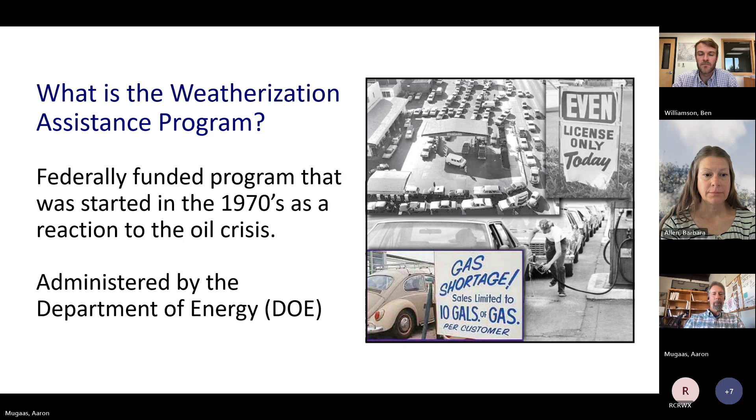The mission of the program is to reduce energy costs for low-income families, particularly elderly and disabled, and children, while ensuring their health and safety. That's kind of a good mission for all houses, right? We want to live in safe, comfortable places. So that's the mission of our weatherization program.

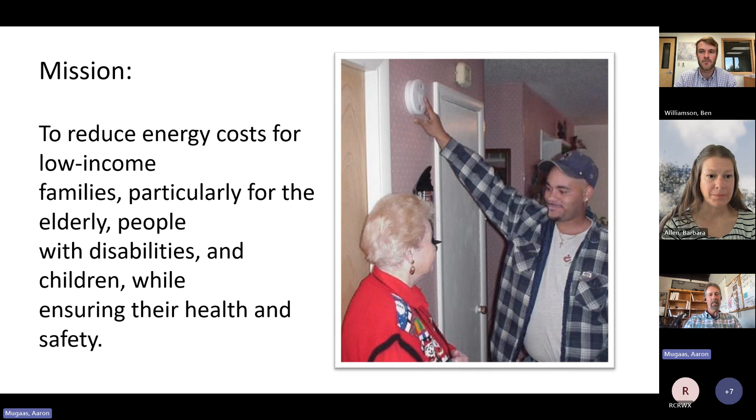Looks like it's just going to have a little delay in changing slides.

The program weatherizes a lot of homes throughout the country. It's pretty amazing to me how much energy has been saved over the course of the program: 7 million families since 1976. This is mostly single family housing, some multifamily as well in larger cities and things like that.

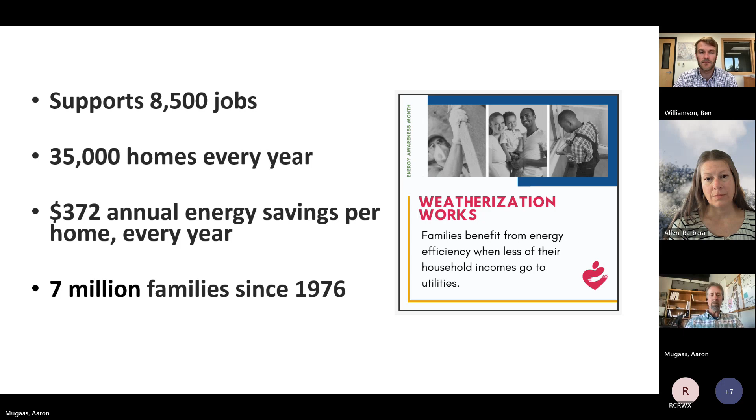In case you're wondering who administers this program and who does the work on these homes, it's community action agencies throughout the country, places like the HRDC here in Bozeman, and Action Incorporated in Butte, Montana. They all have a little bit different name, but they're set up to help communities with all kinds of different things, including food banks, Head Start, things like that. So weatherization, they've been tasked with this program. Usually the money comes to the states and then it's sent to these agencies.

The work done in the home, this is a really long list of work. I don't expect you to memorize or read every sentence, but just to give you an idea, there's a lot of things that we do on homes.

It's very structured, and we have a lot of training for our staff. They know how to think about a house as a system, and then learn all the skills to actually get the work done. So we do insulation and air sealing, minor repairs, ventilation for the indoor air quality piece, and a little bit of base load energy measures. We'll talk a little bit about base load—that's all the things that are user dependent instead of shell dependent. So we try to improve on the base load measures as well, where we can.

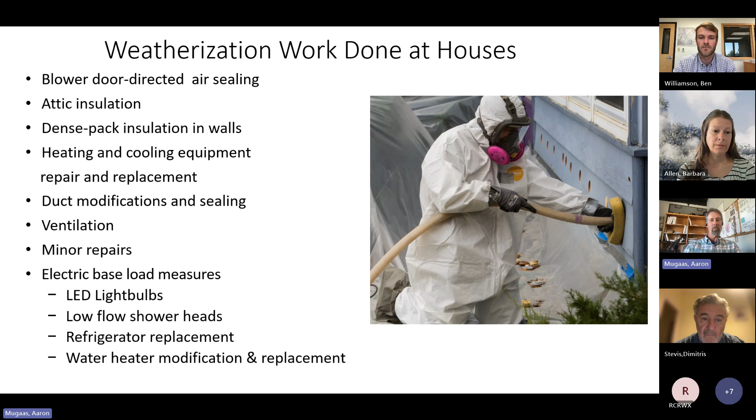The training centers were started in the 1990s by the DOE to help train the staff of weatherization, to get everybody on the same page with the work being done and the skills needed to do that work. So here's us, some of our crew, training some folks at the training center here.

So let's get to the meat of working on homes a little bit. We're going to go over a little bit of house as a system, how energy moves in homes, to make you think like an energy auditor.

So we're trying to reduce heat loss by insulation and air sealing. It's pretty simple, it's not a very glamorous or really all that cutting edge process. I always think of it as we're in the trenches of home performance, right? We're doing nasty, dirty work. We're just trying to get the shells of homes to be more energy efficient.

Existing homes—we have a lot of older homes in America, and believe it or not, there's many homes with zero insulation in the walls, attics, crawl spaces, basements. It even crosses all socioeconomic lines. I've seen mansions in Bozeman with no insulation in the walls because they just weren't built that way when they were built. So it really is something that needs to be addressed, and I think it's starting to be addressed more recently with a lot of the funding that's been coming out. For folks that aren't low income, I think there's some insulation and air sealing money that can come your way as well.

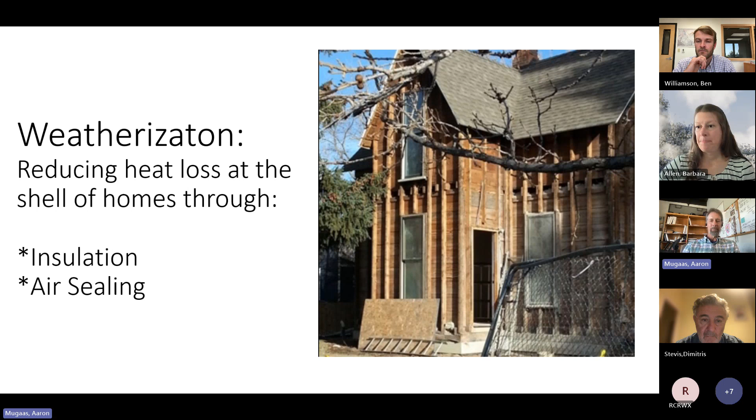So the first process in doing work on a home is what we call an energy audit. There's a lot that goes into the energy audit. You assess the building more like a home inspector, check out all the systems, make sure everything's sound and healthy. You're doing blower door testing and other diagnostic tests like combustion analysis of appliances. You're looking at the heating system, insulation, doors and windows, and then you're doing an energy model. We want to see how much energy this structure is using now, and what would it use with these retrofit measures? How could we reduce that, and what's it going to cost? So we put all that in the computer and figure out what's most cost effective to reduce the energy burden on that home and the energy loss out of the shell.

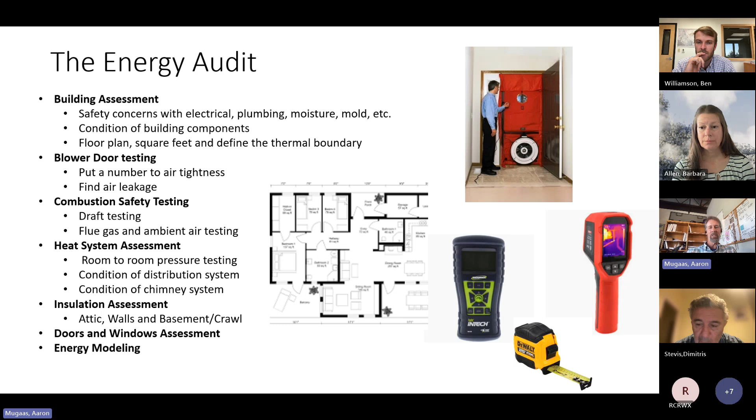So let's do a little bit of talk here about, so we can think like an auditor.

House as a system, that's what we pound into our students. A house is a system of interdependent parts. When you do something to one thing in a house, it affects another. And when they all work together, we hopefully get a comfortable, safe, and efficient place to live.

Sometimes when you do something to a home, you get problems. We're going to talk a little bit about those problems. Sometimes they're not problems as far as endangering anyone, just thermal problems. But sometimes they could be dangerous situations that we create.

Keep in mind the house has been functioning. Sometimes when you change the shell of a home, it's been functioning the way it's been for 80, 100, 50 years, and you're going to change how it performs. Usually that's for the better, that's the goal.

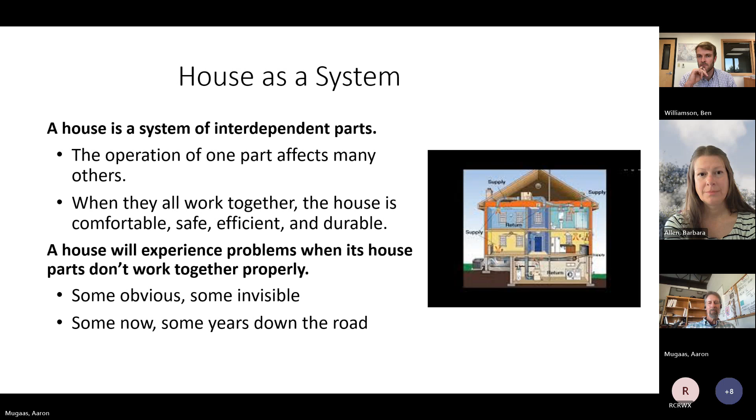This is an example: you have an older home without much insulation. So the heating system has to run a lot to keep up with the heat loss, and the heater has to be pretty large.

When we go in and insulate—let's say we insulate the attic, dense-pack the walls, insulate the basement, plug up all the air leaks—now that big furnace is completely unnecessary. It will actually become even less efficient because it will come on and go off very often. So now we can put in a smaller furnace. If you put in a really efficient furnace, it can be even smaller because it will have 99% efficiency instead of 60% efficiency.

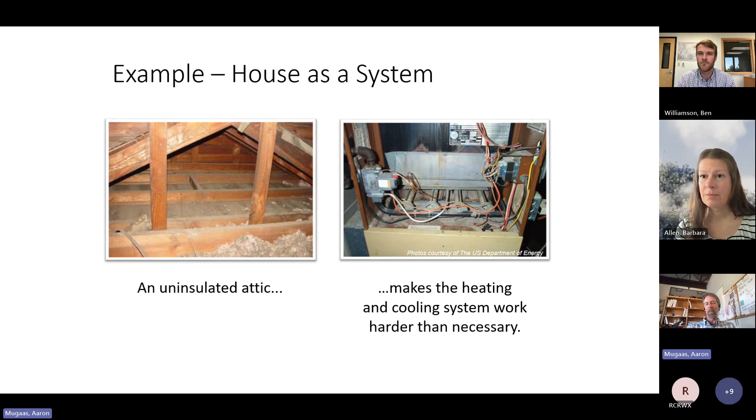So this is just one example of how doing one thing can affect something else. This is why you're paying that energy auditor, by the way. A lot of people can find things to do on their homes, and a lot of people are very knowledgeable about what to do. But it's really nice to have someone who can think about the whole house and give you recommendations based on the whole house as a system.

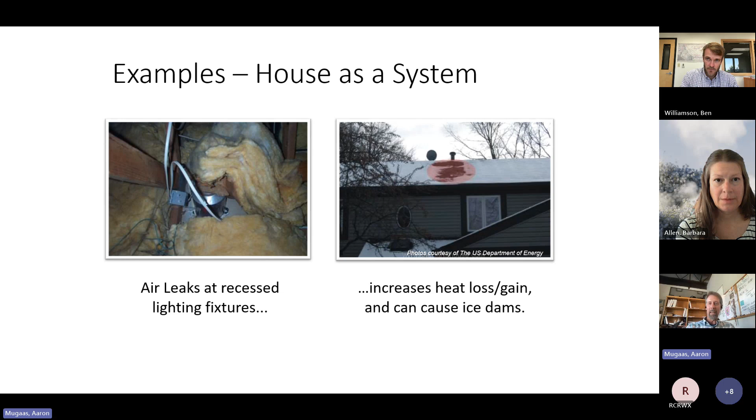Here's another example: we have air leaking into the attic through a can light, say, and it creates a warm spot. A lot of heat is escaping, and we have more chance of ice dams on the roof.

Another quick example: we have a leaky exhaust fan duct, or maybe no exhaust fan duct, that creates moisture in the attic, causing some rot on the roof deck. Also probably a lack of ventilation in this attic, so the moisture can't get out very easily.

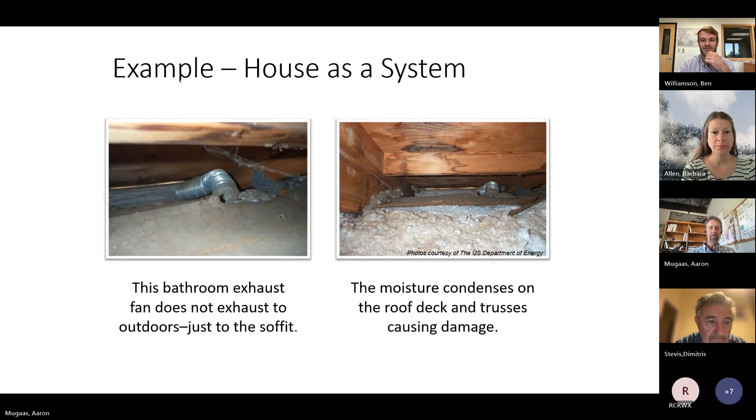One of the things I was saying is that there are some bad implications of the work we do. One of the biggest things we fight in weatherization is that we make houses very tight, but they typically still have traditional atmospherically drafted appliances, meaning they depend on the stack effect for the hot gases to get out of the house. That stack effect is fairly strong, and it has been doing its job for 50 years, say.

But for every CFM of air that leaves your house, a CFM has to enter. So when you stop all the CFM of air entering, all of a sudden that air has to come from somewhere. So when your exhaust fan comes on—the one you just put in to improve your indoor air quality—when your dryer comes on, when your stove fan comes on, and when they all come on together, that can pull those flue gases back into your house from your water heater and your furnace.

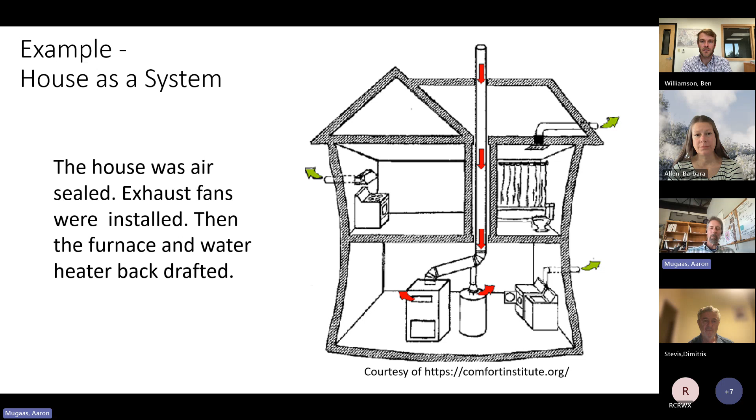So this is something that we go through a lot of pains to make sure doesn't happen, and to correct it when it does. We want to save that energy by air sealing—definitely the cheapest and easiest thing you can do—but we don't want to have these other problems.

Let's talk a little bit about thermodynamics and how energy moves. The big thing here is it goes from high to low. So in our cold climate, our heat is always trying to go out. And in a cooling climate, it's the opposite—heat is always trying to come in to those houses.

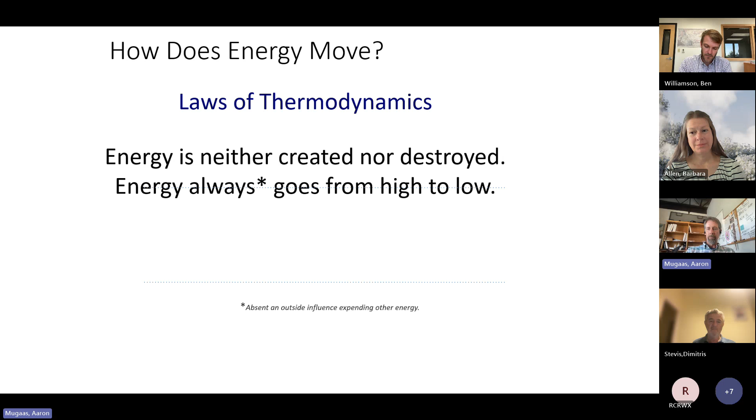There are 3 ways that heat moves through the home: radiation, conduction, and convection.

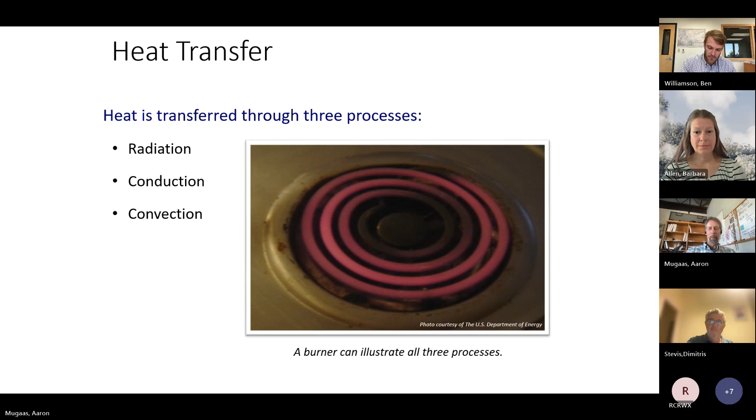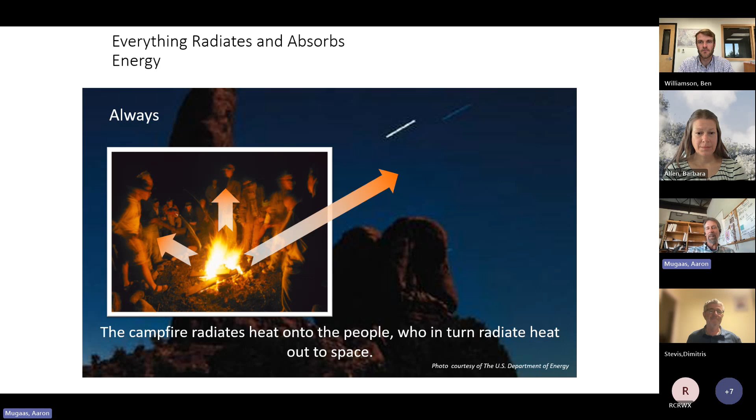Radiation is heat radiating from something. Heat that radiates is absorbed by other things. It's never created or destroyed. So standing by the campfire, heat is radiated to you, and then we radiate that out into space.

Conduction is the heat loss we deal with when we add insulation. We want to stop the conduction of heat through the wall, the attic, or the foundation. That's heat transferred from the burner to the bottom of the pot, for example.

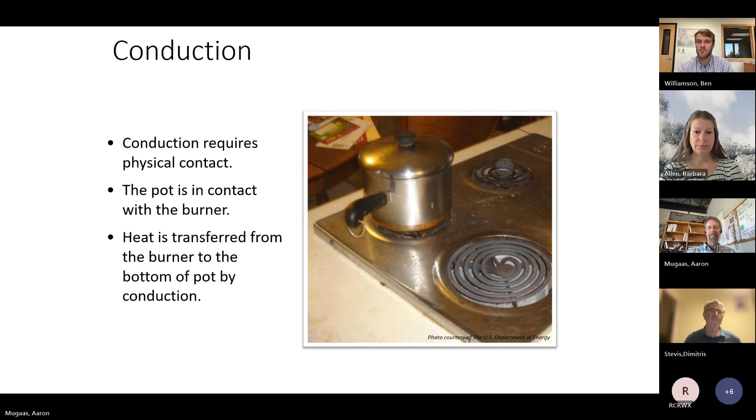Convection is heat traveling through air, water, or whatever medium it is. So it has to have a medium for it to travel through.

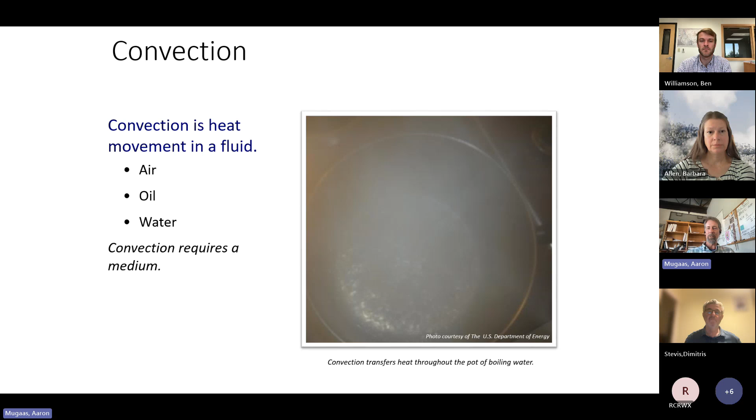In this burner, all 3 are happening at the same time. You have conduction of heat through the metal and into the stove around it. You have convection, air being heated and moving. And you also have radiation, which is infrared energy that can be felt because it's radiating out.

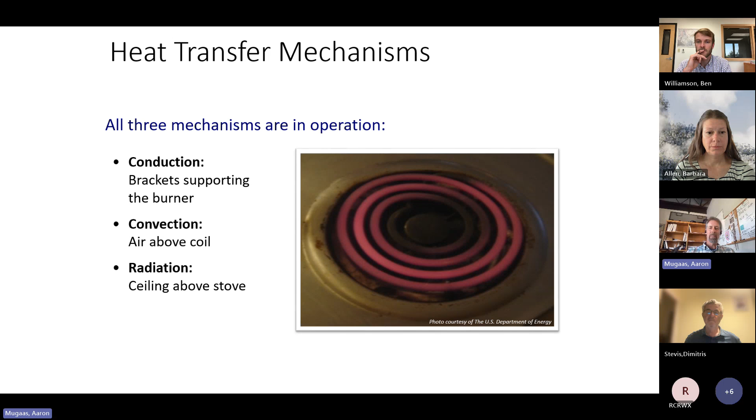The goal of weatherization is to have a comfortable, safe, and efficient home. In order to do that, whether building a new house or retrofitting an old house, we want to have that thermal envelope and an air barrier, and we want them aligned together.

We want properly sized heating equipment, not too small, not too large. We want a really good distribution system so there are no cold spots in the home, and healthy indoor air quality, which goes hand in hand with some of these things.

For example, if you're in an old house with just a central heater, say a space heater in the living room, you're going to have very cold closets, very cold bedrooms, and a higher chance of condensation from interior moisture hitting those cold walls, and a higher chance of mold developing.

So having a house work well thermally is going to help with indoor air quality ultimately.

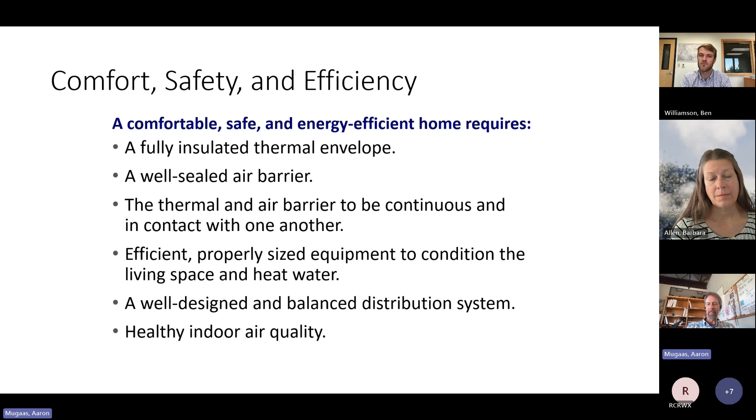The thermal boundary of a home, on a complicated home, is sometimes a hard thing to define and deal with. If you have a very complex home, the auditor needs to figure out where to draw the line for the thermal envelope.

That's a big part of some houses. Some houses are simple, right? It's a ranch house, it's got a big attic, it's a rectangle, so we can easily define that thermal envelope.

This little factoid at the bottom, I love this one: a 7% void can reduce the R value by almost 50%. It's called a thermal window.

I like to give the example: let's say you went down to the Patagonia outlet in Dillon and bought the $800 down parka they use for Mount Everest, with the big hood. You look like the Michelin Man. But the first time you wear it, the zipper breaks.

So now you have this opening in this $800 down parka, and it's not going to keep you warm, is it? It'll keep you kind of warm, but you'll have what's called a thermal window in your parka.

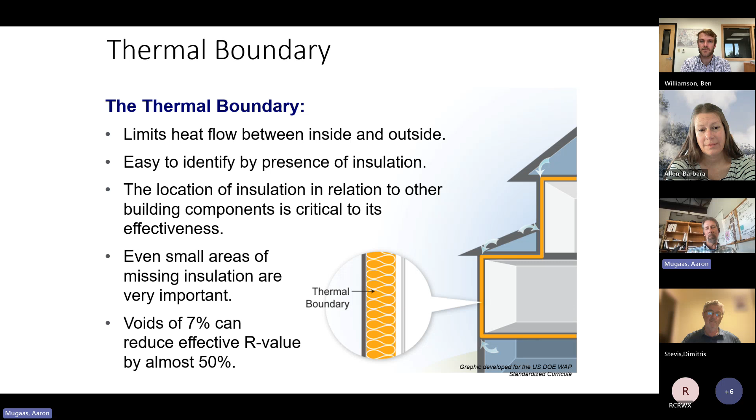That's what we're talking about here: a 7% void, and that would reduce the R value by 50%. So it's very important to have a very evenly applied thermal boundary.

R value, we'll briefly talk about R value. This is kind of a busy slide, but R value is a resistance to heat flow. The bigger, the better.

So we can add R values together. It's a very easy way to assess any assembly, like a wall assembly, attic, or foundation.

By the way, there's a couple rules of thumb. Most building components are about R1 per inch, the sheetrock, plywood, framing, whatever it is. And then concrete is about R1 per 6 inches.

So it gives you an idea if you want to think about your own house or somebody else's. If you have an empty wall cavity, you have about an R4 for that wall. And if you have a full wall cavity, you have about an R15 for a 2x4 wall. So it's kind of the range for walls.

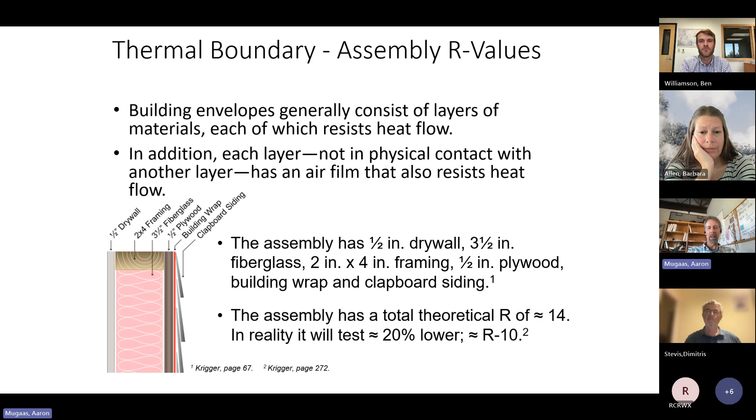And that's definitely why it's very important to get that foundation insulated, at R1 per 6 inches. There's not much going on there as far as retaining your heat in your crawl space or basement if it's bare concrete. There's a thing called an air barrier, which is important on homes.

It's typically the sheetrock or the plaster, the interior surface. It's called an air barrier, not a vapor barrier, so its purpose isn't really to stop moisture movement, it's to stop air movement. And that should be aligned with your thermal barrier to make it the most effective.

Another example I like to give of this is another jacket example.

Let's say you could just wear the insulation inside your jacket and not have any of the nylon. It's not going to be all that warm, right? You still have the same insulation value, but when the wind blows, it goes right through the insulation. So that's the air barrier. It stops the air movement, and it makes your insulation way more effective if it's a dead airspace instead of having air moving through it.

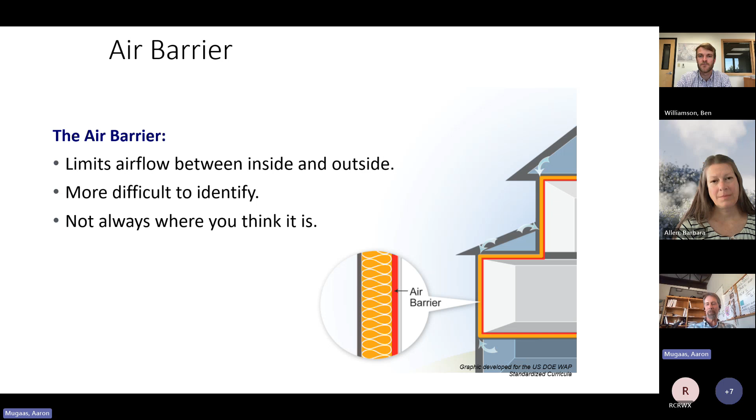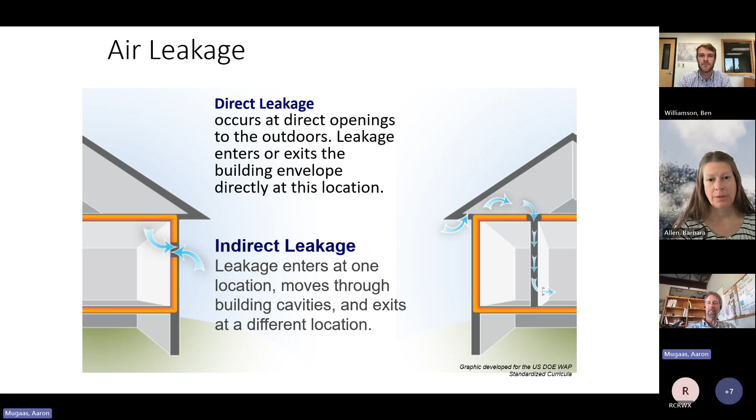So there's all kinds of different air leakages that we find in homes. We've got direct leakage and indirect leakage. Direct leakage people kind of know about usually. They kind of feel it. They walk by it. The indirect leakage is harder to define and harder to find in a home. There's certain things that drive air leakage. You have to have a difference in temperature.

So you have the little... I think on Teams, it's not going to work. My little graphics aren't going to work, but that's okay.

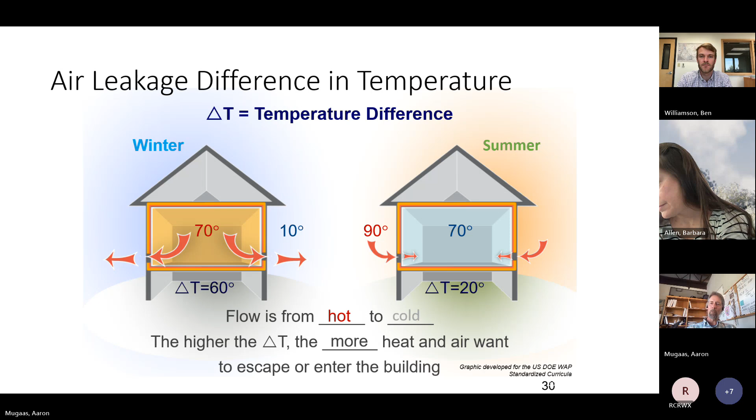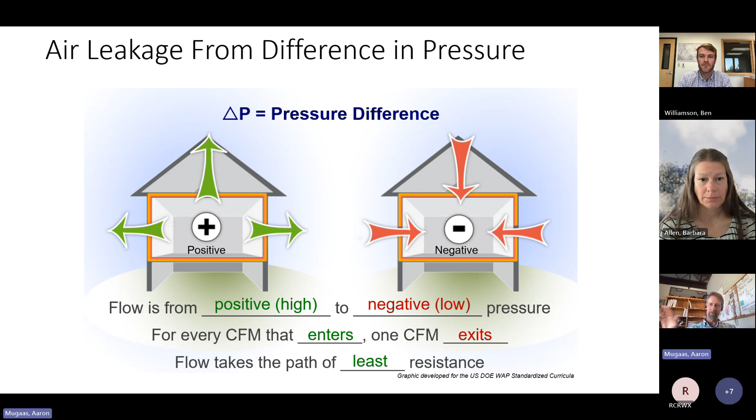As we were talking about earlier, heat moves from high to low. And if you have a hole, an air leak, a temperature difference will drive that leakage through that hole. You can also have a pressure difference. So if you have a positive pressure inside the home, that's going to force air out. Or if you have a negative pressure in the home, it's going to draw air in.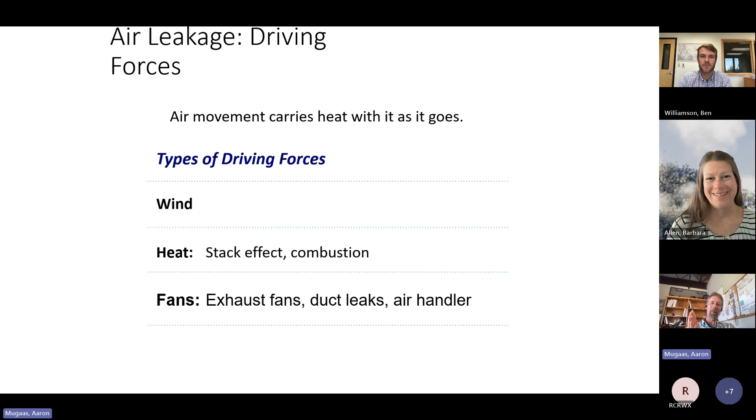And things that create those forces: we already talked about the temperature difference, but you have wind, heat, and fans, exhaust fans, duct leakage, or air handlers can create pressures in your home, which will force air in or out of the home. Your air handler can actually be actively forcing air out of your home or sucking air into your home. Your air handler is supposed to be heating your home, right? Well, it could also be pushing air out of your home as well.

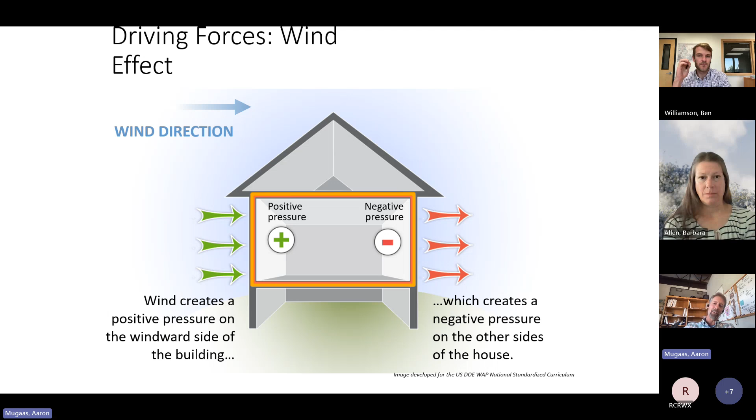So we have wind. And once again, my graphic's not going to work, but when wind blows across a home, it creates positive pressure on one side and negative pressure on the other side. There's also a natural stack effect with a home. If you live in a 3-story mansion, sorry, you're going to have a lot of heat loss from the stack effect. It's naturally air rising through the home, and you'll have air being sucked in the low leaks and forced out the high leaks.

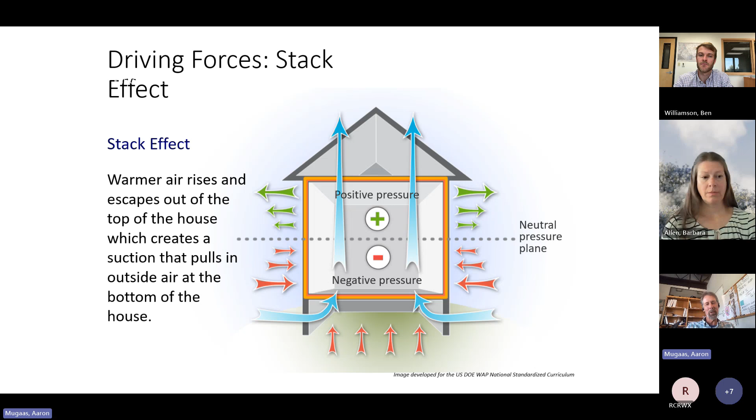That's one of the reasons we've really focused a lot on sealing up the high leaks of a home. We don't even have a savings to investment protocol anymore for attic air sealing, because it's so important. You can stop that stack effect by sealing up all those high leaks, and there won't be as much of a pressure difference at the low leaks, right? So they won't leak as often or as much, at least from pressure. So you still want to seal up those low leaks, but it's really important to get those high leaks sealed up.

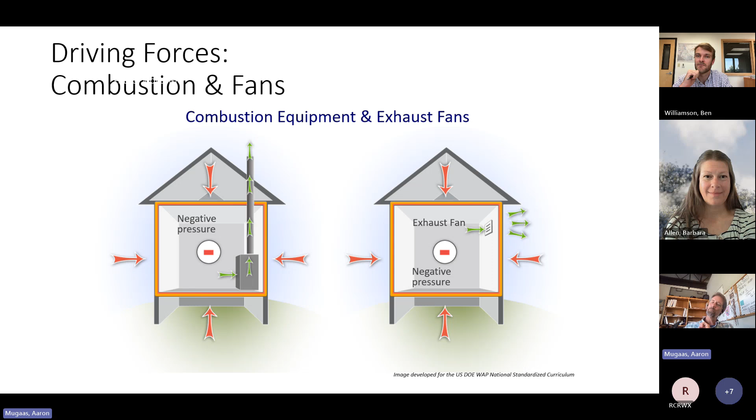Also, exhaust fans can create negative pressure in the home. So your bath fans, stove fans, dryers. Your dryer is your largest exhaust fan in your home, by the way. It's 250 CFM or something, and when it pulls air out of the house, it's creating negative pressure in your home.

Oh, okay. I just have to click on the picture and it'll work.

How do you solve those issues? Well, you can cut off the bottom of your doors to kind of alleviate that pressure. You can put grills above the doors to let that pressure out. The idea is you don't want negative and positive pressures being created by your air handler, because that's sucking air into the home or forcing air out of the home. There are some places in the country where they require return registers in every room, which I'm all for, because it balances that air.

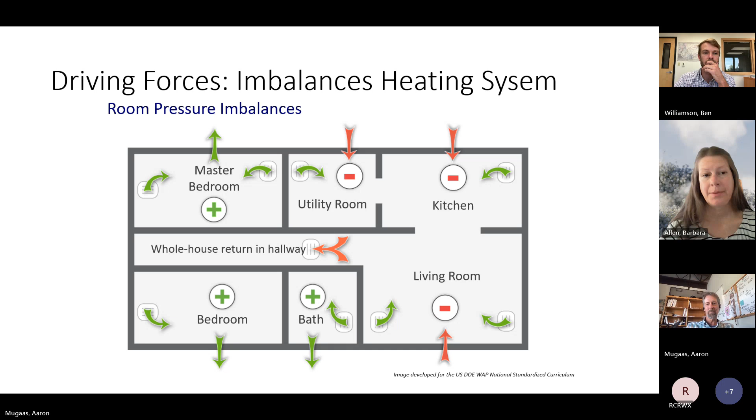So our claim to fame in weatherization and in the home performance industry in general is this thing called a blower door, because the blower door gives us a lot of useful information. It tells us where the air leaks are, for one thing, but once we have a final air leakage number and a tightness of that home, it will also inform us on the ventilation that we want to put in.

So we don't want to over ventilate a home if it already has some natural ventilation. And conversely, we don't want to under ventilate a home that's super tight and getting almost no natural ventilation. So the blower door guides us with that and tells us how much ventilation we might want to put into a house according to how tight it is.

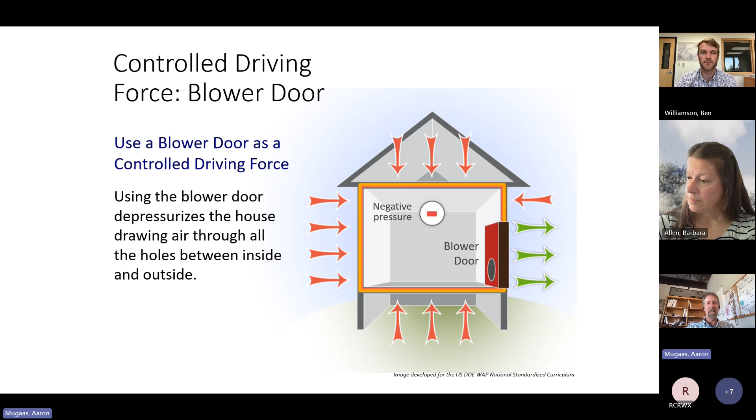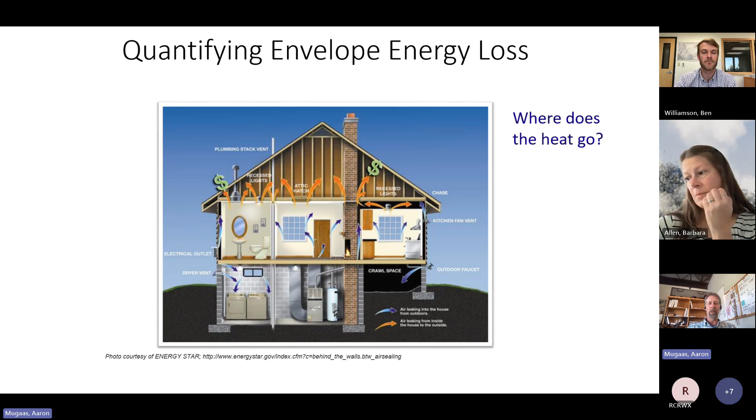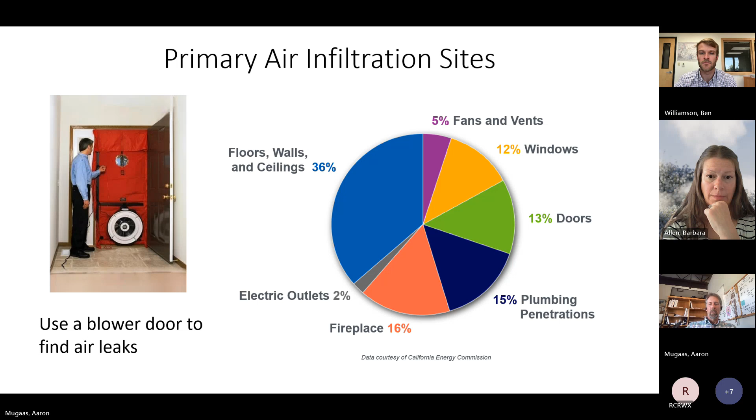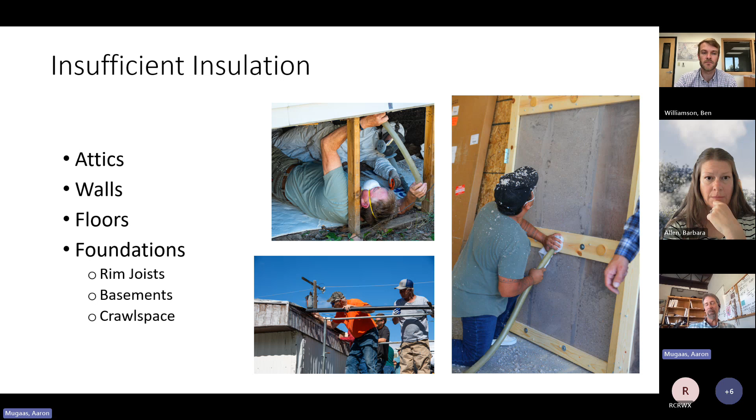And then insulation, right? Insulation and air sealing are the bread and butter of what we do when we weatherize a home. So we want to get insulation in the attics, walls, floors, foundations, rim joists, basements, crawl spaces, and bring it up to at least code or better if you have the means to do so.

Attics are typically just loose filled, pretty easy to do. A homeowner can actually do this fairly well themselves. You can rent the machines from Home Depot, Lowe's. There's charts on the bags that tell you how much to put in for a certain R value, and your goal is an R59. One thing about this though is make sure you air seal first before you insulate. It's going to be really hard to air seal after you put in 12 inches or 16 inches of insulation.

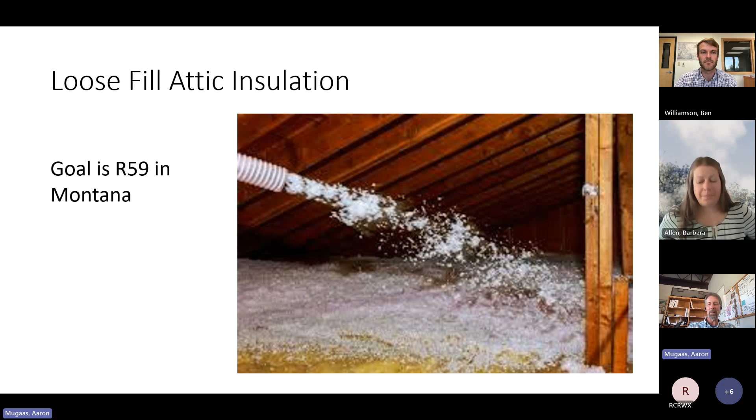And as I was saying earlier, this is the most important place to air seal. You're going to trap heat in your home better. You're going to keep moisture out of your attic, because moist interior air loves to travel to that dry, cold attic air. And when it does, it condenses on surfaces. So it's an added benefit of air sealing, to keep that moisture out of your attic.

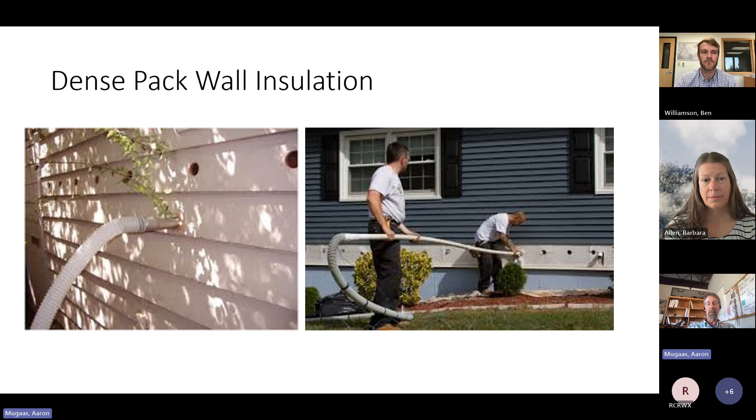For old homes, dense packing your walls with insulation, with cellulose or fiberglass. I kind of like cellulose. There's both sides that will argue about those, but the goal here is to just get a dense packed insulation in there, because in older homes especially, you tend to have a lot of air leaks through the framing, through the sheathing. So it not only gives you a good thermal barrier, but it also stops a lot of air leaks that were occurring in that wall.

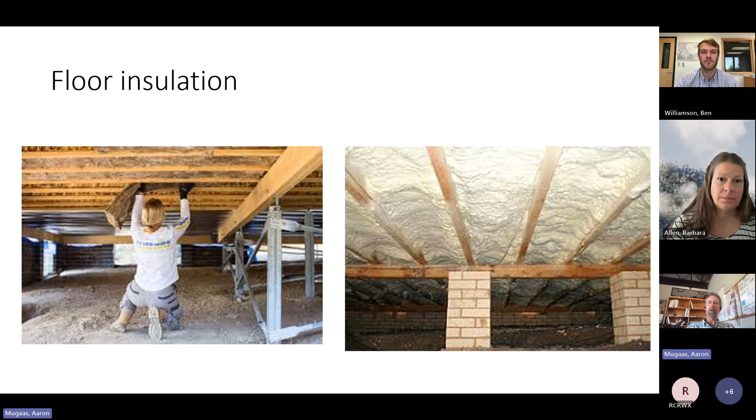So various things you could do to floors. You could insulate with spray urethane, fiberglass. I kind of prefer the foundation insulation, but there's some cases where the floor might be more desirable. And that's a whole nother can of worms, maybe we can talk about it at the end. But yeah, floor insulation, you're just trying to draw the line somewhere to get that thermal barrier to stop the heat escaping.

There's also various ways to insulate your foundation. Foam board is kind of preferred because it has a little bit more resistance to taking on water. Blue board, pink board, it's closed cell foam, so it's not going to take on water. Fiberglass, if you live in a wet area, you wouldn't really want to use fiberglass on your foundation. And then you can do spray urethanes. There's different methods there.

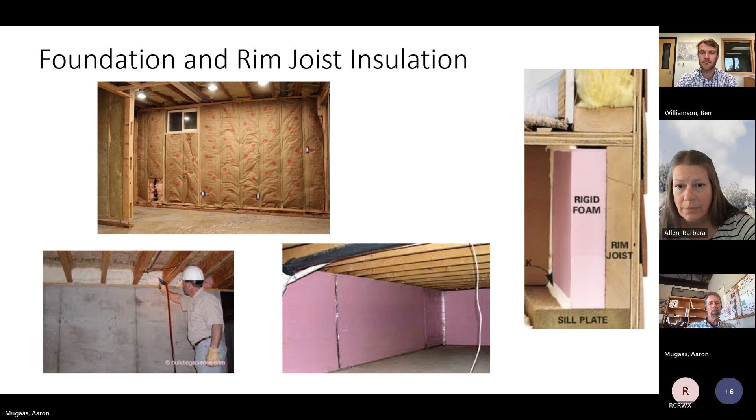Replacing windows doesn't always have the greatest payback as far as getting your money back in energy savings, because for the labor and the tiny bit of square footage that you're actually affecting, you're not going to get that return. Although there's a lot of other benefits to windows, right? You'll also be stopping some air leaks from really old windows. You'll also have a window that actually operates correctly and provides egress for bedrooms and things like that. So there's added benefits to windows besides just the thermal benefits.

If you are going to keep your old windows, there's different things you can do to help air seal them and make them better thermally by adding a storm window. So if you don't have the money to replace all your windows, you can make them better.

Two panes of glass is an R2. One pane of glass is an R1. And a new window that's reasonably affordable from hardware stores is about an R3, because they do some things to the window to make it more efficient by adding some low-E coatings, by adding some argon gas between the panes. They can make them a little bit more efficient. Now, you can step it up and get R5 windows, but you pay exorbitantly more for those R5 windows.

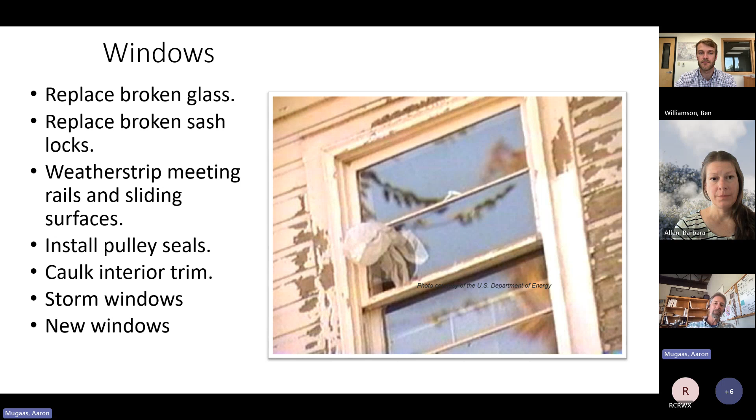Doors, kind of the same story. Retrofitting doors. Doors are not as cost effective as far as your energy savings, although there are so many added benefits to having a door that functions correctly and actually opens and closes and doesn't have air blowing around it. But you can do some weather stripping and sweeps and things like that to improve your old doors.

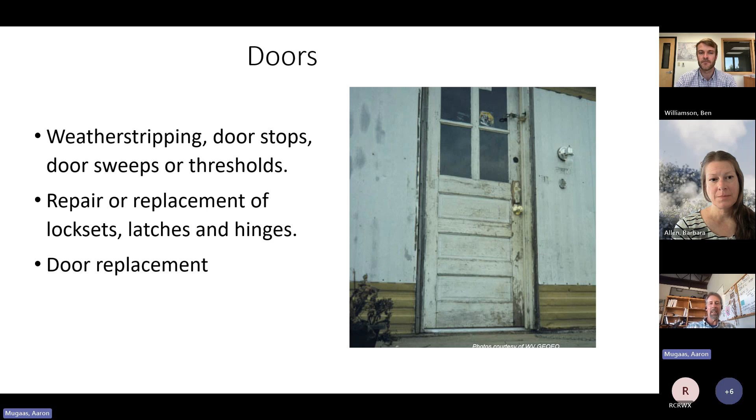Let's talk a little bit about indoor air quality, moisture and ventilation. So there are pollutants in homes that get trapped, right? And if you live in an old leaky house, ironically, you're probably going to have really good air quality, especially if it's not fire season. So that's the only exception to the rule, is that when you're getting outside air for your fresh air, and it's fire season in Montana, then that's the time when you don't want that outside air.

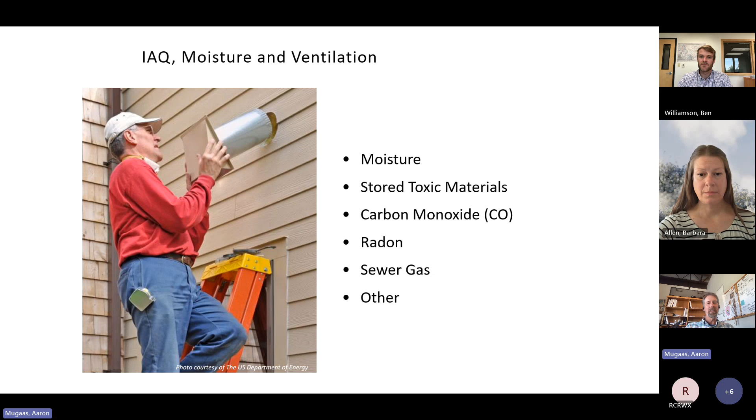Or maybe you live next to a busy highway. Maybe you live near smoke industry, right? Smokestacks and things. So the outside air isn't necessarily going to be your fresh air. But houses that are built today and ones that we weatherize are tight, and they will trap any pollutants in them more than a house that's leaky. It's kind of just a byproduct of trying to save energy. And you get carbon monoxide, radon, sewer gases, all kinds of different things can get trapped in homes.

Water is a big one, because having high humidity in a home can promote mold growth. So humans are constantly producing moisture with their activities, with their hobbies, and so we want to try to get that moisture out of the home. There's some different sources of water. I like the construction materials in the first year, 40 quarts per day of water being produced. Combine that with a super tightly built home, and there's some issues that develop.

I've more and more seen builders complain about getting foggy window panes after the first year. And I think it's because of these moisture issues and the house being so tight that the seal for that thermal window is... hot, moist air wants to move to dry, cool air really bad, and it's a thermal process, and so it will get into any imperfection in that thermal window and cause it to fog up.

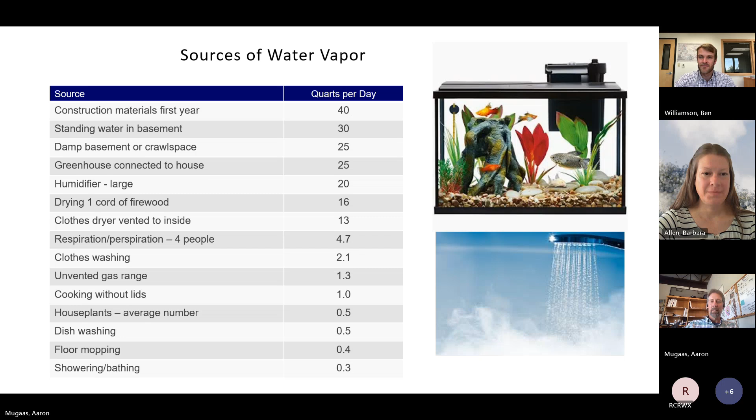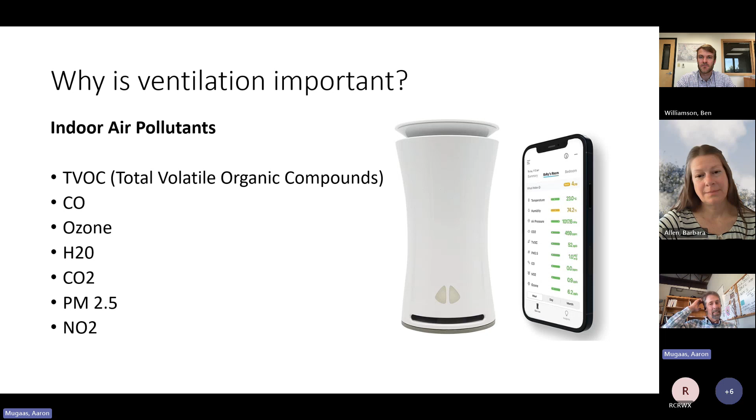So ventilation is important for all these indoor air pollutants, volatile organic compounds, carbon. Hopefully, you don't have carbon monoxide. You don't want carbon monoxide even in a drafty home, for that matter. You have ozone, H2O, CO2, PM2.5s, and nitrogen dioxide, and these things will get trapped in your home. Here's kind of the basic goal of ventilation, right? Stale air out, fresh air in, but while keeping a neutral pressure.

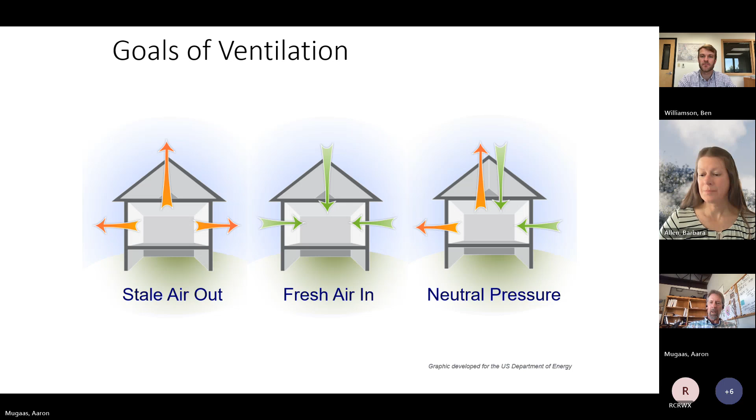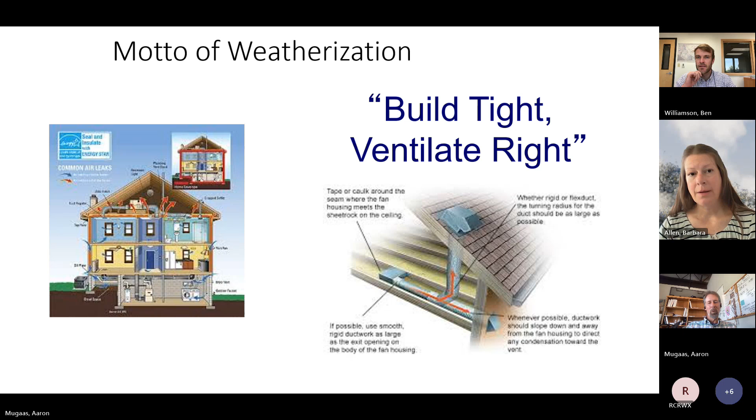So the motto of weatherization, build tight, ventilate right, is kind of a good motto for building in general. And I want to see a bigger push towards a little bit more higher tech ventilation than we're currently doing in homes, but we'll get there. So there's different strategies. Leave the home leaky, right? That was a strategy actually for weatherization. We had what we called a building tightness limit. And so we would only seal a home to a certain point.

Well, now we've gone to where we seal homes as much as we can, and we install ventilation. And we do whole house exhaust ventilation currently. Someday I pray that we will move to balanced ventilation, which is really what you want. You want to be controlling the incoming air and the outgoing air. And you could filter the air coming in. So even during fire season, right, you could be filtering that air. And that's the ideal system to ventilate your home.

And of course, you want spot ventilation to get moisture out of the bathroom or out of the kitchen. That's always important as well. But you want to ideally have a separate system for the whole house.

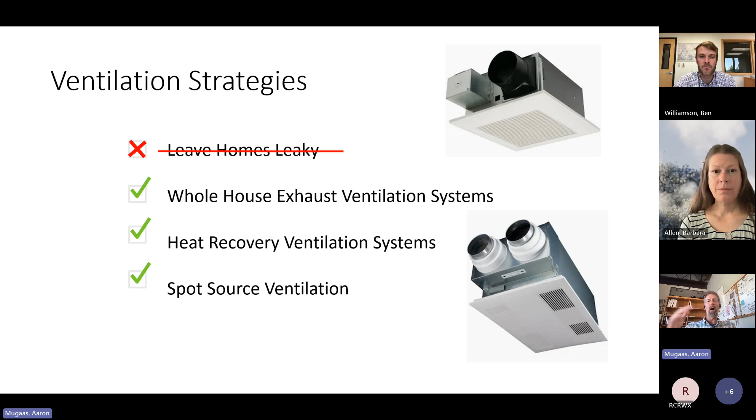I think I'm kind of running out of time here, but we talked a little bit earlier, just mentioned baseload energy. So we want to improve the shell of our home, right? We want to stop that heat escaping from our house, but we also can do other things in our house to reduce our energy use. And that's our base load: our lighting, our water heaters, our water usage out of our taps, out of our showers, our appliances. So all those sorts of things we can, as homeowners, try to reduce that load.